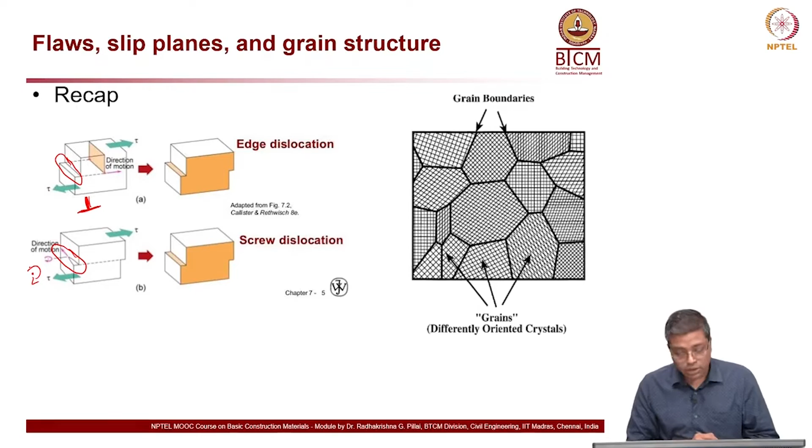Now, how do these slip planes, flaws, and grain structure influence the mechanical properties? They do have an influence on mechanical properties. Flaws and defects, like edge dislocation or screw dislocation, can be weak locations within the bulk material. Because they tend to be weak, they decrease the strength of the material. If there are a lot of defects, flaws, voids, cracks, etc. present in the material, then the material in general will have lower strength, and it might also reduce the toughness.

This is all associated with the energy required to propagate a crack. If there is a flaw, we can think of it as a crack, maybe a micro crack, but there is some energy required to propagate that crack. That energy is the most important thing when we talk about toughness, or even in the case of strength, because it eventually leads to the fracture behavior.

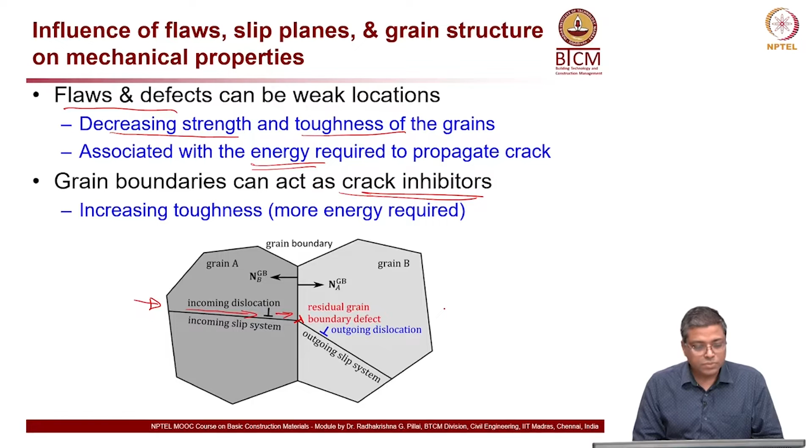Now, effects of slips and grain boundaries, I'm going to call grain boundary GB here, on toughness and ductility. Atoms at the grain boundaries are at a higher energy state than a particular atom within the grain.

Now, slips are blocked at grain boundaries. We showed that drawing earlier, repeated here. The slips are blocked because the grain boundary acts as a crack inhibitor, stopping the crack from progressing. They are blocked at the grain boundary, but as you apply more stress, there will be a point at which it starts moving in the best possible direction, through the next or adjacent grain available. This process requires more energy because you have to cross through that grain boundary.

You need more energy to deform the material. Now look at the drawings here. You can see this is an incoming slip plane, ISP, and an outgoing slip plane, OSP. So you can see here, look at the direction of these arrows.

So these perpendicular symbols are actually the edge dislocations.

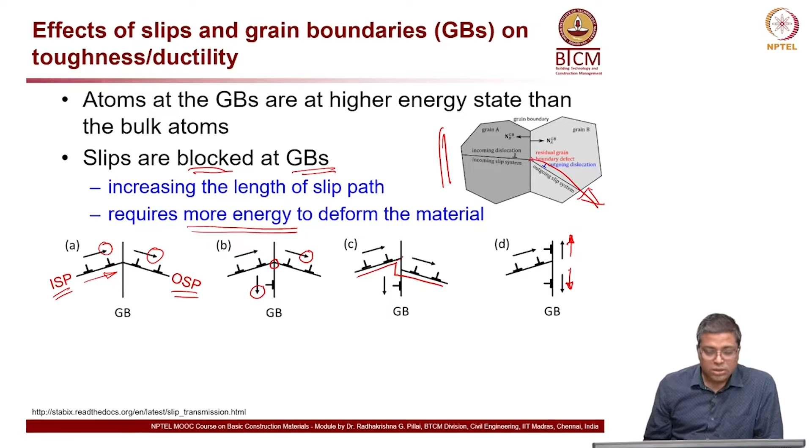Because of this, the size of the grain boundary has an influence on the toughness, we can say that.

Now here, when you look at the left side micrograph, this is 100 microns - the length of this little straight line is about 100 microns. So you can say the size of this is 1, maybe 2, 3, 4, 5, 6, 7... let's say 0.8 microns is the distance from this point, 0.8 millimeter, sorry, 0.8 millimeter. So you are looking at within a millimeter in size, not centimeter. This one image is within 1 millimeter in size.

Now, on the left side you have larger grains as compared to the image on the right side. When you have larger grains, if you have a crack along the grain boundaries, this is the intergranular crack. If I measure the length of this red line - the red line indicates the crack - the one on the left side will be shorter than the one on the right side. This is less and this is more.

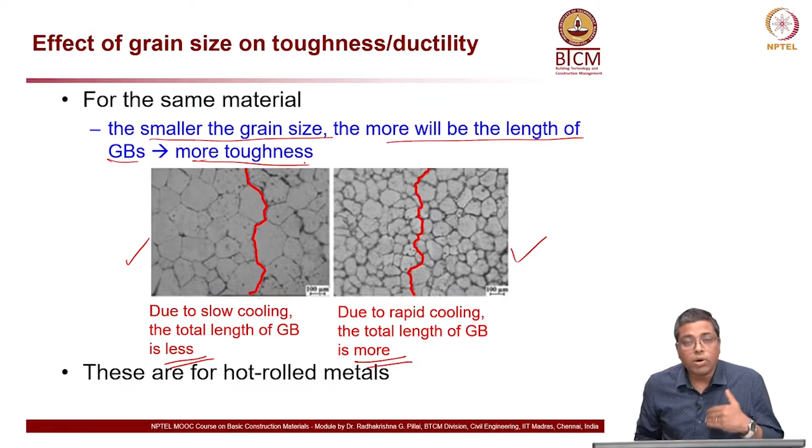So these are mainly for hot rolled metals. If you actually do cold rolling or cold drawing also - these are two different major ways by which we do cold working, a common term, cold working or strain hardening, etc. So cold rolling, where you have two rollers here and the material is coming out through these rollers, whereas in case of cold drawing, you are actually pulling the metal through a die - probably this is a die - and then you can see the change in dimension or reduction in dimension as the material is pulled through that.

So cold rolling and cold drawing are two different processes, but the objective is kind of similar, mainly to increase the yield strength. That is typically what we do this for.

So this process changes the microstructure, and in general what happens is with increasing cold work, the hardness and strength increase, and the ductility decreases. So hardness and strength increasing is probably a good property you want, depending on the case, but decreasing ductility is usually not a good idea, because then it becomes a brittle material, and brittle material will have catastrophic failure in nature, which we don't want.

So we want to maintain or increase that lost ductility. How do we do that? To restore ductility, heat treatments are done during the manufacturing itself. So cold drawing is done to increase the strength, yield strength, or even hardness of the material, but in that process the material loses ductility. So to regain or restore the lost ductility, there are some heat treatments which are done.

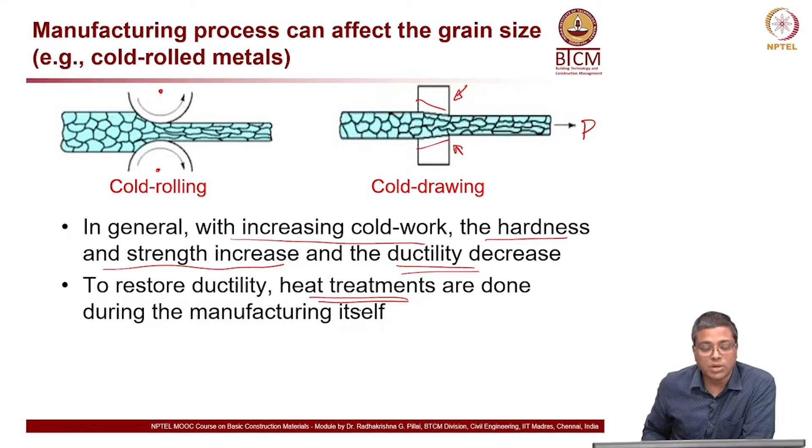Okay, now heat treatment - what is the idea? When you do this heat treatment, it changes the grain size to a desired level as you want. So two major ways of heat treatment which I am going to discuss here briefly are annealing and hardening.

Now let us look at annealing first. You have heating and then slow cooling. What happens in this process is, when you heat the material, the large grains which are present tend to break down, and then as it progresses, it allows a little bit of grain growth, meaning a new set of grains are formed which could be larger in size. That depends on the rate of cooling. So you are basically rearranging the grains - and this happens not in a molten stage, this happens after the material solidifies. So you rearrange the grains to a desired level of grain size.

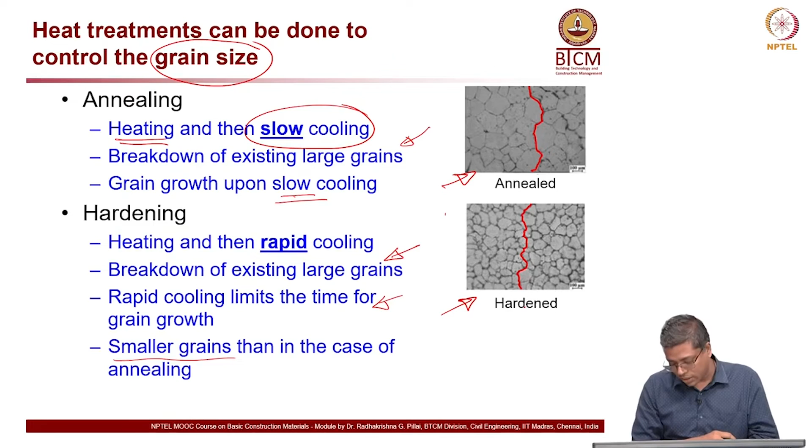For the same material, if the grain size is more, then you will have low toughness. If the grain size is smaller, you might have higher toughness. Now generally when we look at this, heat treatment tends to increase the grain size from the cold work stage. So this is the cold working stage, and this is after the heat treatment.

Now look at the graph on the left side - you can see recovery. This is the increase in temperature. There is a recovery happening here, then recrystallization, and then the grain growth. The grains recover slightly from cold working - that is the recovery stage - and then at the recrystallization temperature it gains, and then you cool it down. So the grain growth is allowed.

So here, look at the dislocation density first. You can see all these light gray lines - they are the dislocations present in the material. Now you have these dark lines here, which indicate the grain boundaries. You can see several grains over there.

Now what will happen? The dislocation density decreases as you move to the right, and as you keep heating the material, the internal residual stress decreases as you go through these three phases.

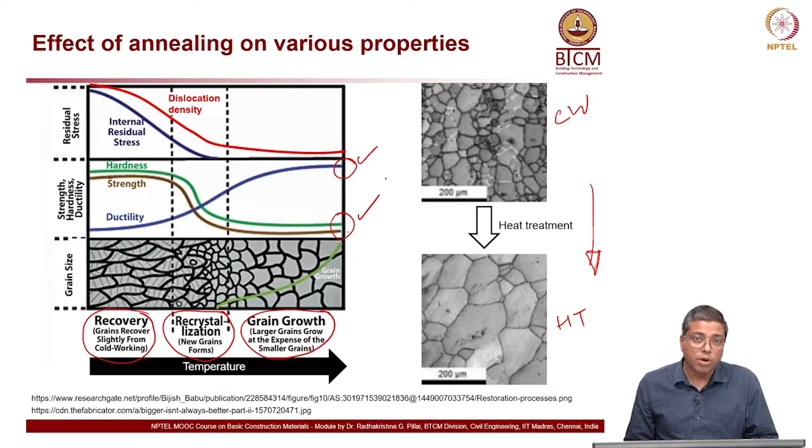Now let's go into the fourth type of defect, which is volume defect. We started with point defect, then line defect, then surface or plane defect—that's grain boundaries—and now we are going to talk about volume defect, which are mainly voids and inclusions.

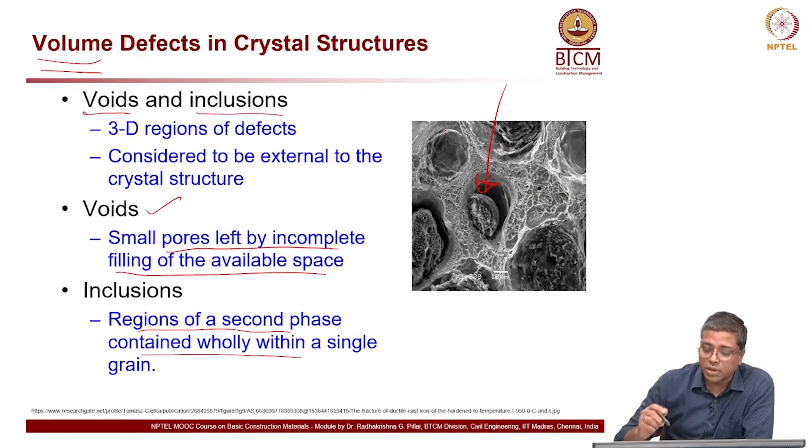As you keep applying tensile stress, you can see the black arrows on each of those drawings. As you apply this stress, this particular portion gets elongated this way, and the void or inclusion is there—you can see this space here. So as I pull, the inclusion gets detached, and then you have stretching happening here. Here also you can see, the other way.

Here you can see it is getting pulled this way, and like that this deformation happens. Eventually you reach the stage where these voids start growing. Here you have this void growing, and this one too. Eventually, after some time, they will grow in such a way and try to join, leading to the onset of necking.

There is a flow of material happening at this stage. You can see this shaded region gets connected, or the voids tend to become one large void, and eventually they crack. That is coalescence, and then cracking or even fracture happens.

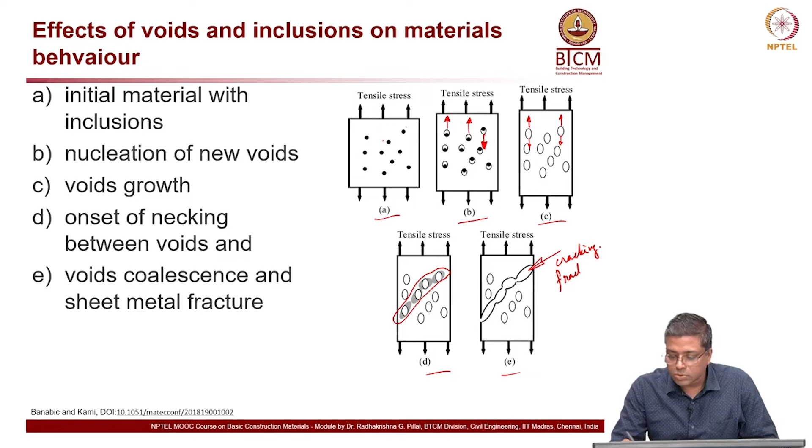Fracture happens. Now these are some real examples. The first picture is a microstructure of gray cast iron. You can see in the cast iron a lot of these flakes present - this is one flake, this is another. In this picture you have 3 big flakes of graphite present, you can see graphite here.

This is an image of an alloy of iron and 4% carbon. Cast iron has a lot of carbon present, 3 to 4% easily by weight. The microstructure has two main constituents. The long pale regions are flakes of graphite or carbon, you can see this long flake here.

These are the reasons for the brittle nature of cast iron. When some force is applied, the crack will follow the path of these flakes, or stress concentration will happen at one end, maybe here. So along these graphite flakes you will have stress concentration, and the crack will propagate through that.

This is the reason we don't use cast iron in many structural applications, because the failure is very brittle in nature and you don't really see a deformed structure. We already discussed this in the previous lecture. So we have materials like ductile iron, which has inclusions and a little more ductility than cast iron. Rather than having flakes like this, ductile iron will have spherical inclusions.

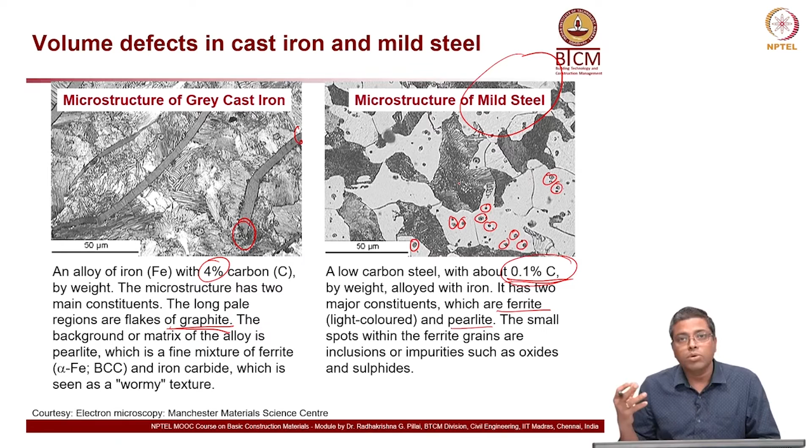So whatever inclusions or impurities are present there, this will have an influence on the failure pattern, because they tend to behave like a weak point when the load is applied.

Now let's talk about alloys. What is alloying? It's a process in which two or more metal elements are melted together in a precise combination, not just mixing, to form a specific material with certain target properties.

There could be properties like it should be malleable, the ability to be flattened, increased strength, sometimes high ductility, malleability, weldability. Many of these properties include corrosion resistance, or sometimes we might want the material to be very shiny in nature.

Many properties are targeted, so based on the target properties, we include other elements and mix them properly in combination, and that process is what is called alloying. In general, we can say the material manufacturing process, MMC, is melted first, materials are melted and mixed together, and then finally cooled.

Various liquid and solid phases exist, and we call them different phases, solid phase or liquid phase, depending on the absolute temperature at that time in this cooling process.

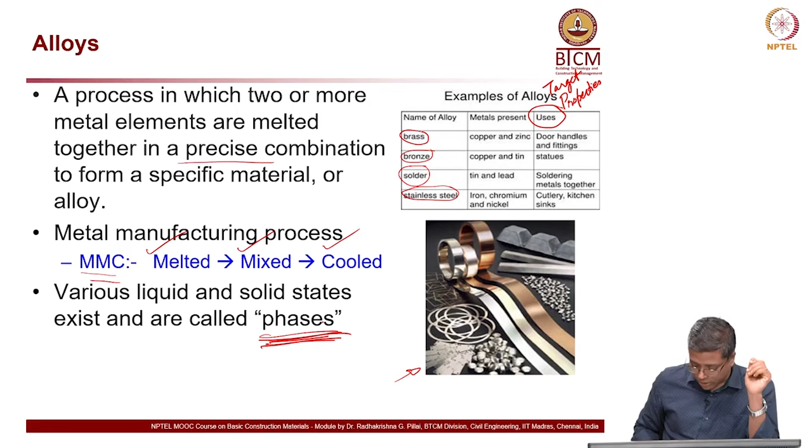Now, phase diagram. We just discussed different phases, right, various liquid and solid phases that might exist depending on the temperature at which the material is. This is generally understood by something called a phase diagram. A phase diagram exhibits the relationship between the material composition and transition temperature, so composition versus transition temperature is essentially the phase diagram. These transition temperatures depend on the material composition; it is not that the transition temperature is same for all materials. It definitely depends on the combination of the materials or the mixture proportion of the material.

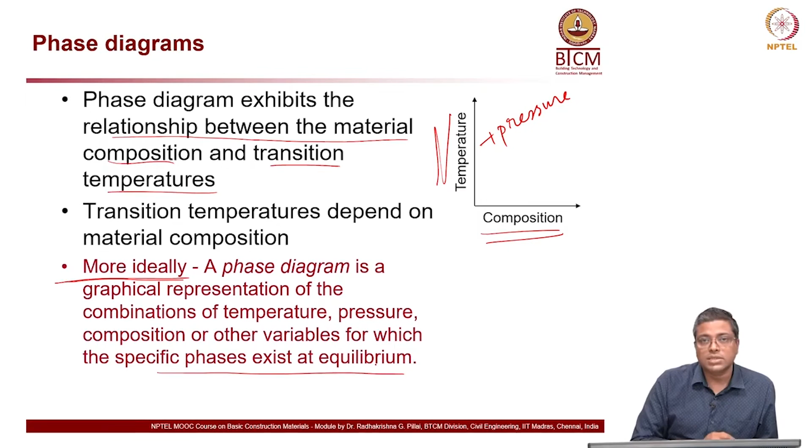So more ideally, here I am showing only temperature and composition, but that is not the only thing. Ideally speaking, a phase diagram is a graphical representation of combinations of temperature, pressure and composition - not only temperature, but pressure also comes in. So temperature, pressure and composition, or even other variables, for which the specific phase exists at equilibrium. This is what a phase diagram is.

We will very briefly talk about the phase diagram for water. This is how it typically looks, and you can see here there is an orange region, a purple color region, and a green color region - one is for solid, then liquid, then gas. Now, if you follow the border between each of these phases, you can say at that border, at that point, a slight change in either pressure or temperature will cause the phase to change from one to the other. For example, if I take this curve here, a slight change in temperature means moving in the horizontal direction.

Let me draw it more closely. Let's say there's a slight change in temperature along this small red line I've just drawn. At the same pressure, if the temperature slightly increases, it will vaporize, and if the temperature slightly decreases, it will condense. So you have C for condensation and V for vaporization.

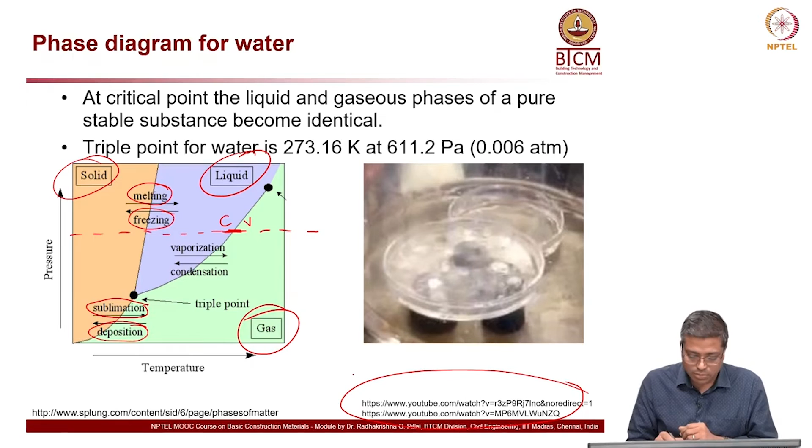Before that, I request you to watch these YouTube videos, very good ones, actually on water. You can see ice crystal formation, boiling water, and also gas bubbles bursting, all visible at the same time in the same petri dish used in this experiment. All three phases coexist because in the same dish, different locations experience different combinations of pressure and temperature, and slight movement in these leads to a change in phase. So please watch this video as an assignment. I am telling you, please watch this video, it's very interesting to see.

Okay, now let's look at the binary phase diagram for two soluble materials. This is one of the simplest phase diagrams which we are going to discuss here.

You can see here again, this is the composition, the same thing for material A at the top axis and material B at the bottom axis. Now, if I draw a line along this, I have 25% material B and 75% material A as the composition.

Now the temperature increases on the axis, you can see. So here this means the material starts melting at this temperature. That is the melting point of which material? Of material A, because at this line you have only material A, 100% A and 0% B. Now if you go to the right end of this graph, this is 100% material B and 0% material A. This clarity should be there, because A is increasing towards the left and B is increasing towards the right.

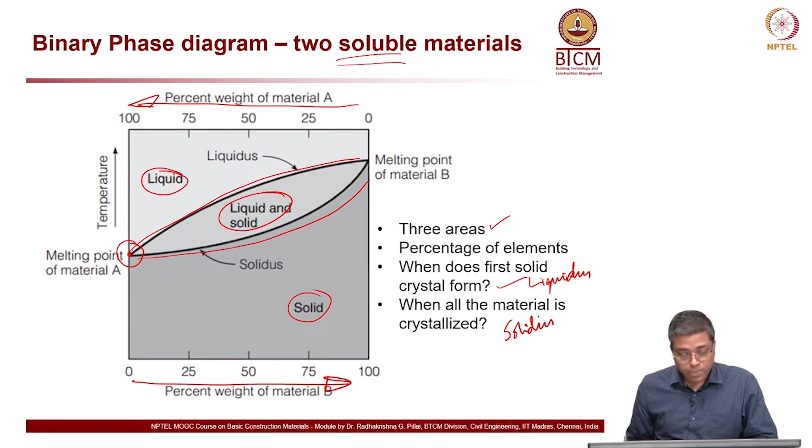Now the same diagram with an example. Let's take a composition along this line where you have the liquid phase: percentage of B is 79% and percentage of A is 21% in this line. Now on the right side here you have another composition which is 68% solid B and 32% solid A, happening at this point here.

Now if I take this point here, I will have A and B present, but then I have to look at whether both solid and liquid are there inside that state. Now that is the tie line. This horizontal dashed line is called the tie line, which connects the solidus and liquidus compositions of liquid and solid.

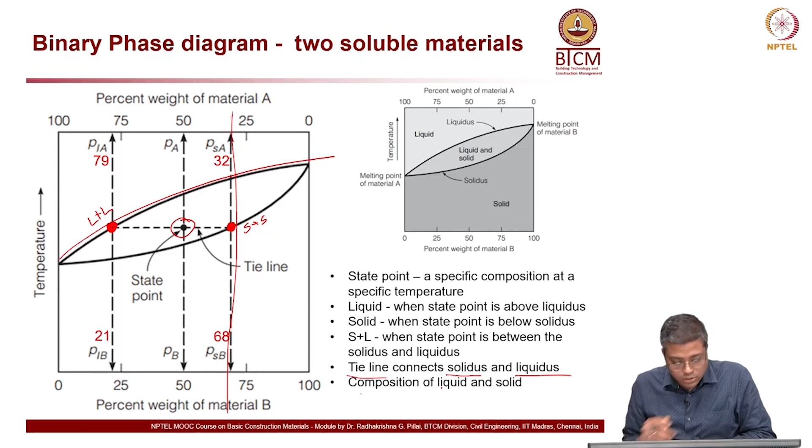This is the liquidus line, and this is the solidus line. So that is clear now. You have liquidus, you have solidus, and this region is 100% liquid, this region is 100% solid, and this region is solid plus liquid.

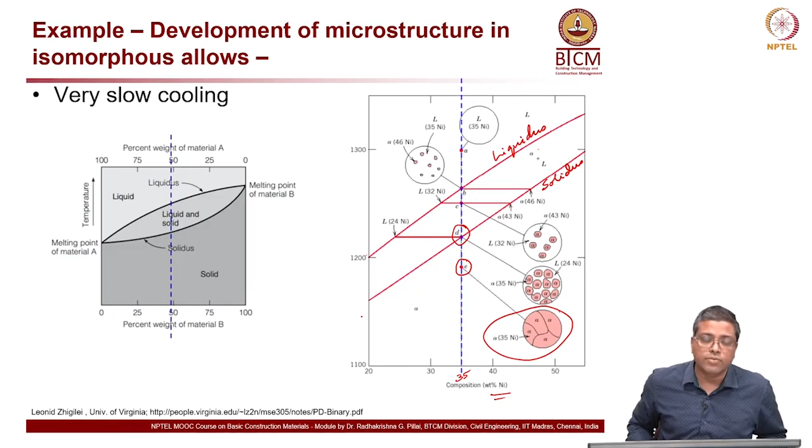To summarize, we looked at plane and surface defects. We talked about grain structure and grain boundaries, and how grain structure, grain size and shape might affect material behavior. We discussed how they affect toughness in detail, and also volume defects, mainly air voids or inclusions inside the material.

And then we finally talked about the phase diagrams: the phase diagram of soluble material systems, and partially soluble and insoluble materials. I request you to go through the textbook. Thank you.